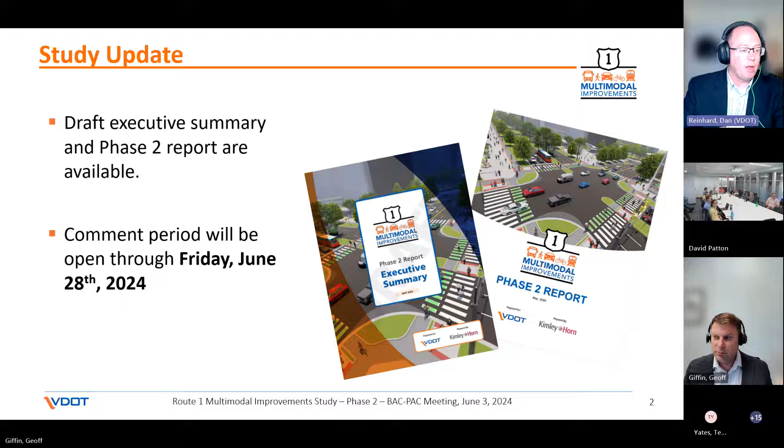One of the things we want to make clear is where we are in the process. There were quite a few comments or questions looking for very specific details—the one that jumps to mind was about what kind of trees we're going to plant. So I thought this would be a good opportunity to talk about where we are.

Right now we're doing a feasibility study. The goal of Phase 1 and Phase 2 is: can we build? First we evaluated the different options. We made a recommendation in the Phase 1 report to bring 15th and 18th Street down to grade and do improvements at 20th Street. We've expanded that to 23rd Street now in Phase 2. Phase 2 is to further flesh out those details, look at the TDM strategy to reduce traffic, expand on the multimodal analysis, and do 10% design plans. But that's all still really in that feasibility window.

Down at the bottom you see a rough sketch of what the process will look like going forward. So we're at the feasibility study stage. Once we get full funding for the project, we'll move into the project development process, which starts with scoping, and we'll move through each of these steps to get to construction. There will be another round of public meetings as part of that project development process, including a public hearing. So just because we wrap up Phase 2 here does not mean this is the end of the opportunity for public input.

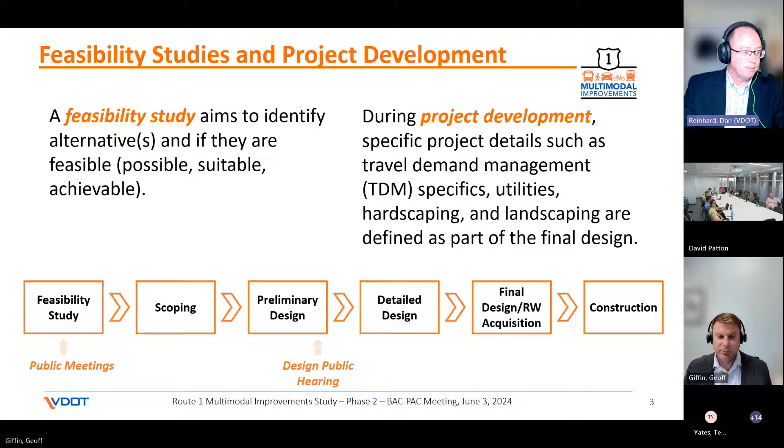So a couple quick updates on the speed study. We have put together a speed study and submitted it to the district traffic engineer. It is currently under review. We are expecting comments from him, and there'll probably be some back and forth, but we are anticipating that this will get approved so we can move forward.

The speed study south of 23rd Street to the Arlington County line—your request for that speed study was received and passed down to staff. They have talked to us. We are doing a preliminary analysis. This will be considered a separate project, a separate initiative from the Phase 1, Phase 2 study, the Route 1 multimodal project. That speed study would be considered a separate initiative.

Arlington County would be responsible for funding that effort, and VDOT would certainly conduct it. One of the interim steps we're doing is having our VDOT traffic engineering look at the available data—do we think this has a hope of success if we do a speed study? Because speed studies are fairly lengthy and can be fairly expensive. We were going to go through an initial evaluation process, pass that data along to Arlington County, and they'll make a determination with us about whether it's worth investing that time and effort. So that's where we are right now: VDOT Traffic Engineering is doing a cursory review of that area.

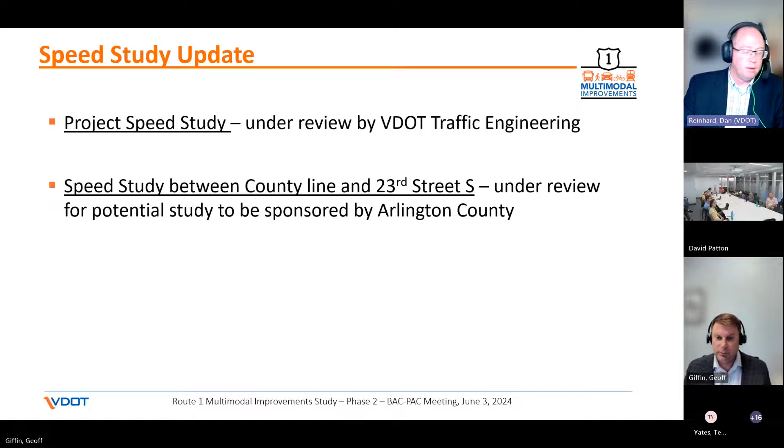Now we'll try to get into some of the questions and comments you passed along. There were a bunch of comments about enforcement, and I know enforcement's a big hot button issue. The way the project is looking at this is we've met with Arlington County Police Department as well as Virginia State Police, but the approach the project needs to take is looking for ways we can assist them with construction-related enforcement in the future. There were lots of questions of whether they're going to do enforcement, whether enforcement will be front and center, and what the agreements are.

Unfortunately, the project can't create policy for either of those entities—we can't drive their enforcement. But one of the things we did do is talk through: okay, if you go out and do enforcement, what are the criteria you need? Where do you have to be stationed?

Because there were specific criteria where we have to be in a certain place on the side of the road, out of traffic, those sorts of things, we have some ideas based on those conversations with, for example, what they call a perch, an area they can sit and run radar. So we're going to be incorporating some of that into the 10% design plans. We'll go back to them and work through that design, and hopefully we'll have that for you in the fall at our next public meeting. That's kind of the way we're looking at enforcement.

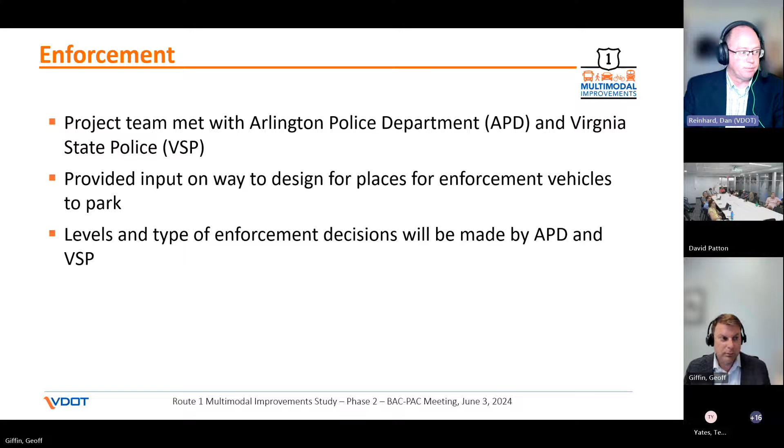For travel demand management, there were some questions about the outreach we've done with the regional transit providers. It was kind of a listening session for us in some respects. We did have some back and forth with them. We confirmed existing service, talked about planned and future service. Several told us about studies they're doing about their service and changes they may be trying to make. Not that they had detail for us, but there are processes going on in the background. So they helped us with our TDM strategies as far as how do we shift people onto transit and different modes of transportation. We talked through with them the existing needs at the bus stops under 18th Street, and that fed our relocation of those onto Bell Street. That's where we went with the travel demand management discussions with the transit providers.

As we get into some of the data here, I'm going to turn it over to Geoff Giffin with Kimley Horn. Great, thanks Dan, and good evening everyone. I mentioned before I'm Geoff Giffin with Kimley Horn, and I have a variety of other folks with me this evening, some of the more technical folks that have been helping on the study, so if we have more detailed questions later they can help me answer those.

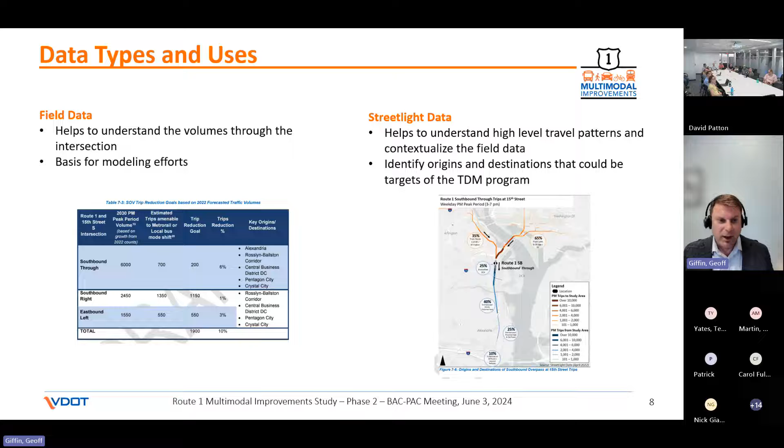So we mix and match those a little bit together. It's not always an apples to apples comparison, because the data from streetlight isn't every individual vehicle - it's a conglomeration of whoever has their devices turned on, so it's a bit of an estimation. We don't take that as the ground truth, it's just a pattern we use for our planning. Hopefully that answers some of those questions related to the data.

Another question related to the data was on figure 3-2 in the report, where there's a gray box that says poor data due to the weather and Omicron. There were questions about whether the whole data set is still good. I wanted to clarify this box represents a very short window of time, a couple weeks to a month, where there was probably the last big snowstorm this area has seen and everything was shut down. With the Omicron variant surging, there were a lot of changes with people working from home again. So that was a blip on the radar - we just ignored that short window of time, but the rest of the data is still very valid. It was very helpful as we looked at patterns coming out of the pandemic and what we call the new normal. That's how we were assessing it, and that clarifies what that note meant on that figure.

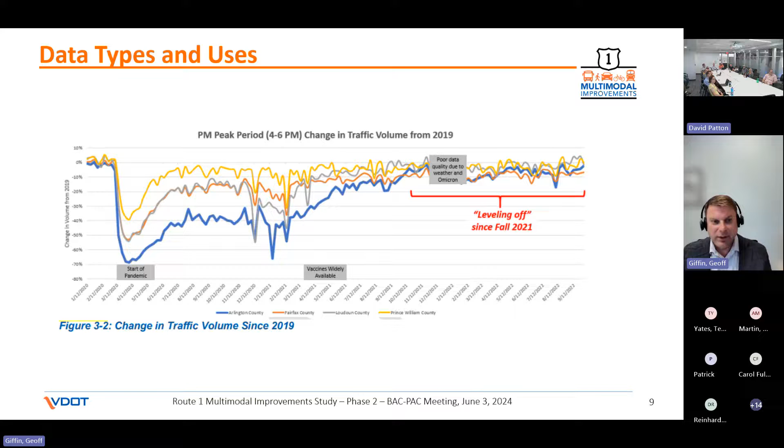So the next series of questions and comments were very location specific. We're going to go along the corridor, starting from the south.

Starting at 23rd Street South and Route 1, there was a question whether VDOT will include a dedicated left turn signal on the eastbound movement. If you look on the screen, this would be coming down on the screen to turn towards the right of the page—that would be eastbound to northbound. There currently is not a left turn arrow now.

We were planning to not add that, mostly because operations worked without it. If we did add a left turn phase or arrow, that would likely increase the need to raise the cycle length for the whole traffic signal. And not only would we have to raise the cycle length for that signal, we'd have to raise it for all of the signals along Route 1, because that's a coordinated system tied together to make sure they operate well together. So at this point we don't anticipate having that left turn arrow, but as Dan mentioned earlier, this is a feasibility stage—things could change in the future, but right now we're not planning on that.

There was a question why we didn't include a no right turn on red for the eastbound right turn movement. Again, this is the same movement coming down on the page, turning to the left of the page, eastbound to southbound. There's not currently a no turn on red there now. That movement is very heavy from a vehicle standpoint, and we did test it with a no turn on red, and what we found was that operations deteriorated pretty poorly. The queue spilled back past Eads Street, so that's not really a viable option at the moment.

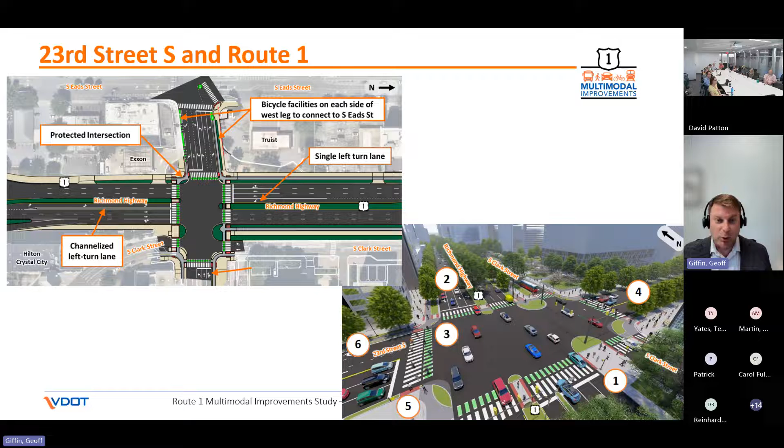All right, moving to the next intersection to the north, 23rd Street and Route 1. There was a question why there was a recommendation for the eastbound right turn lane to be stop controlled. You can see on my screen here, this movement. The answer is we are coordinated very closely with a signal plan that was being developed as part of an adjacent development. That's what was included in that design, and that design had been vetted very closely between Arlington County and VDOT, the traffic engineering and development staff. So at this time, that's what we were planning to maintain.

There was a question whether that could be signalized. That would be a very similar operation, and that could be considered again in the future into the detailed design.

There was another question at this location about how the signals could be improved for safer bicycle and pedestrian crossings of Route 1, dealing with conflicts, and whether LPIs would be included here. The answer to LPIs is yes, we will have LPIs. Again, there is an adjacent development that's going on, and it is responsible for improvements here. So the intersection we've based our design very closely on is tightening up that intersection.

It's bringing it more compact. There are other things being added, including a second crosswalk of Route 1. There currently is only one, so that does improve additional pedestrian circulation here. And also wide median refuges would allow for two-stage crossing if folks think that's more comfortable.

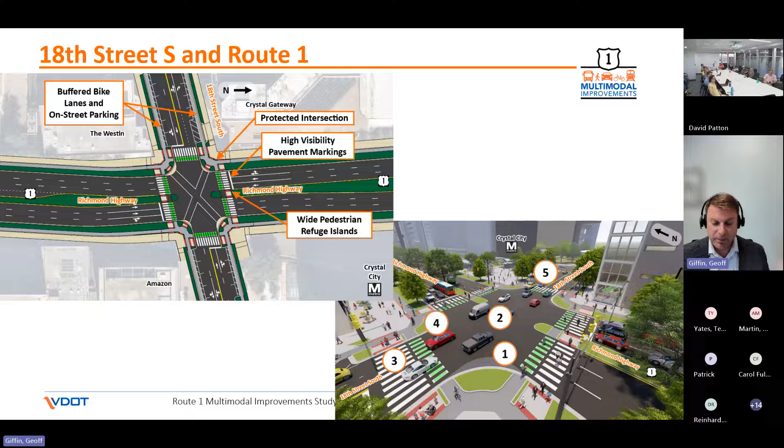There's also a variety of questions about the specific operation of the scramble related to the cycle length - would that increase the cycle length, how many phases would there be? Overall, whether or not there's an all pedestrian phase or pedestrian scramble does not change the cycle length.

We're going to need to match the cycle length for the corridor. Really, that's driven by 23rd Street and 15th Street. So having an all pedestrian phase, the Barnes Dance, doesn't change the cycle length.

With the pedestrian scramble, there will be 3 phases. Northbound and southbound traffic along Route 1 would be 1 phase. The second phase would be east and west along 18th Street vehicle phases. And the third phase would be the scramble, where all the pedestrians and bicyclists could occur without conflicts from the vehicles.

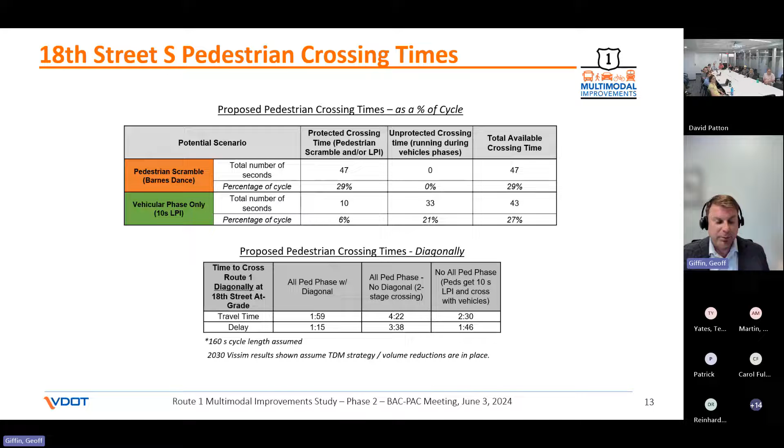Moving north again to 15th Street at Route 1, the next question was related to the eastbound movement and whether we needed to have the 2 eastbound left turn lanes, and whether that was important from a vehicle standpoint. Also, is there anything we can do for bicycle pedestrian safety at this location?

So yes, those 2 eastbound left turn lanes are very important. That's a very, very heavy movement from a vehicle standpoint. That's kind of the last opportunity to go from the west of Route 1 to the north, to either go north into the district or up Route 110.

So it is very important that we keep those lanes. But there are a lot of opportunities for bicycle and pedestrian safety which we've implemented here. We proposed no turn on red for the whole intersection, LPIs again for all of those, large median refuges, and the proposed lower speed limit. So there's a lot of safety measures being implemented along with this intersection.

There was another question or comment related to whether or not in the southbound direction on Route 1, the rightmost lane could be a right turn only lane instead of a shared through and right. We did look at that as one of the options based on earlier comments in the study.

What we found was that we believe the 3 through lanes are very important. It's part of the core capacity for the corridor - this is on the NHS system. So we think it's very important to make sure we have 3 through lanes. We did consider adding a right turn lane on top of that - obviously there are trade-offs with that, it's a wider crossing. So this is where we are with the recommendation for now, but if there are further comments on that, it can be looked at a little bit more closely.

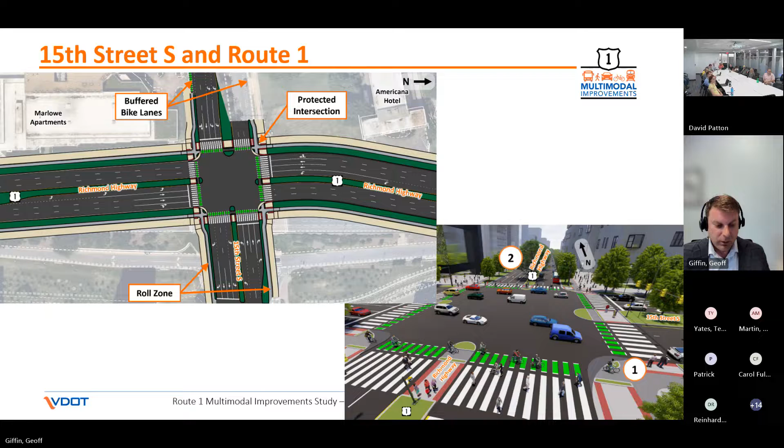That also provides the opportunity to connect down to the planned Longbridge Drive bicycle facility that staff is planning, and to the Mount Vernon Trail via the future bridge across the Potomac. So there's a lot of opportunities to connect the facilities along Route 1 further north with other existing and planned facilities. On the west side, this would connect to Army Navy Drive and all the facilities there, and into the Pentagon to the west. So there's a lot of ways to circulate from there, and the Route 1 facilities would really enhance the network.

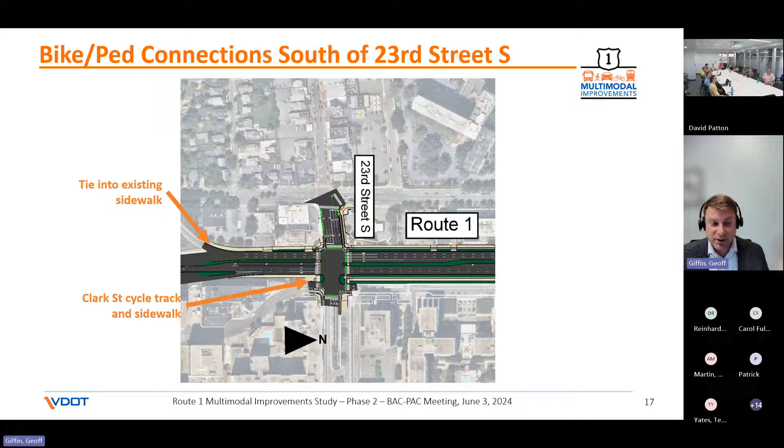So we tried to answer as many questions as we can. Dan, I'll give you a chance to add anything else that I perhaps forgot or that you wanted to add on, so feel free to.

Hi. Can you go over again what happens between 15th and 12th, especially for bike paths that are on the west side? How do they get off of Route 1 before it becomes 395?

Yes. And on the east side there's going to be a connection to the future bike path over there? Yes. Okay, thank you for managing to put most of our questions into a very compact, useful explanation. We look forward to studying your slides.

Other questions? I have some quick questions. One, can you make the speed limits consistent at the southern end where you don't currently have the speed study, and you're going to do the speed evaluation and then see about doing a speed study? I'm asking, do you need to do the formal expensive speed study in order to make a determination that you're just going to make the speed limits consistent for that entire stretch?

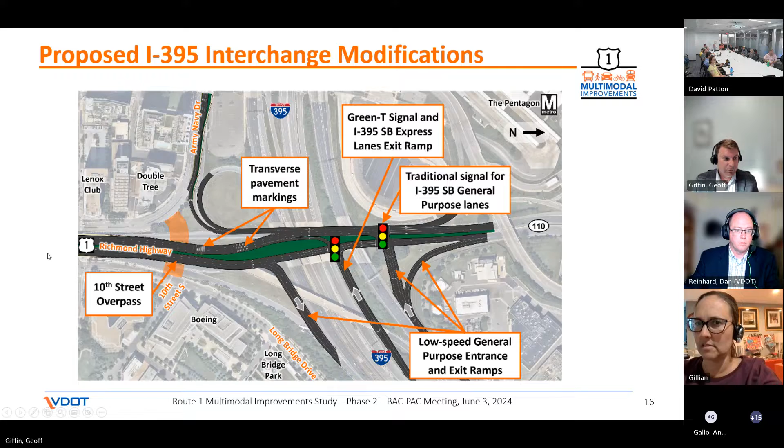So the bike infrastructure is shown here on Route 1 as the light gray lines behind the green. I'm trying to remember, I don't know that we've ever shown bike infrastructure on 20th Street itself. Oh, just the picture you're showing here doesn't have any bike infrastructure.

So Geoff, can you point to the gray for the cycle track? I see it on the map, but you also have a rendering. The rendering doesn't have any. It's here, kind of hard to see. So on this page, is this rendering what you're expecting to show?

Like those crosswalks are not going to have separated bike markings, that it's just going to mix when it comes to the intersections?

So this is the only intersection of all of them where we do not have the protected intersection geometry. And part of it's because of the constraints of those existing buildings, including the new building on the southeast corner.

So you're saying the bike infrastructure just disappears at the intersection? We will have to terminate it and have a mixing zone at those corners, yes.

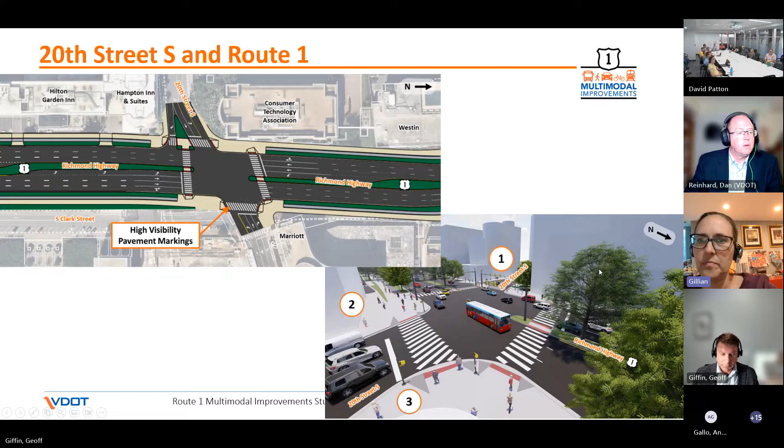And then the other question I had was about the ramp down to 12th that you were talking with Pam about. I'm mainly worried about the personal security aspects of that, the safety in terms of, is that going to be well lit? Is it going to be, are the sight lines going to be good? Is it going to be monitored, or is it going to feel like a scary, dark tunnel that people are very suddenly forced into?

It may be very similar to the 15th Street ramp they have now, where you come up from 15th Street onto Route 1, and it will be a ramp up next to a retaining wall. But we haven't gotten into the level of detail where we've evaluated lighting and how much we're going to provide at that point. Some of that gets into the detailed design we don't have yet.

Do you have women on your design team? I feel like I haven't seen any women present for you guys. We do, actually - we have Kyla on tonight.

Hopefully you can factor that in, because if you design something that isn't safe from a personal security aspect, it's not usable by a large segment of the population. With redevelopment, as more properties embrace Route 1, this will become less of an issue and we can look at different treatments along that section. But we wanted to provide connectivity for anyone who wants to travel further north on Route 1. Right, but you have to make sure you design it so it works for anyone, not just people brave enough to walk down the cavern.

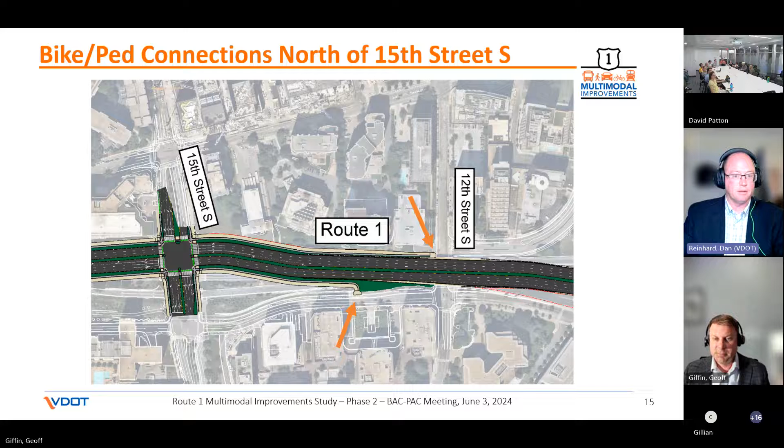Thank you very much, we appreciate your time and responding to our questions - very helpful. Look forward to getting your slides. We really appreciate that you did this on short notice. Thanks for having us again. Thank you, Dan. Take care, good night.

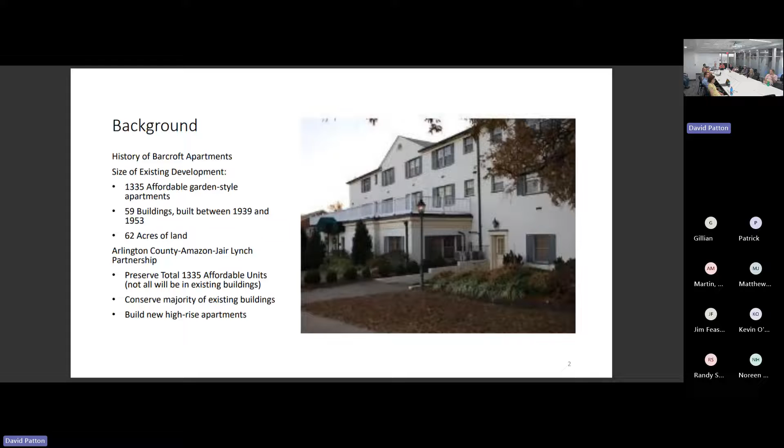But to do that, they have to do some redevelopment in order to pay back and everything else. So anyway, go to the next slide, David.

So this land use study and the expanded working group, I'm trying to explain to some folks, this is something between an area plan and a site plan approval. It's kind of a weird in between. So as you'll see, we got to see some things, but not all things and what the plan's going to be, because they're going to be developing this thing over many, many years.

So this is just a point at which the county is going to approve some of the concepts. And basically, there was a lot of focus on places where the plan deviates from existing planning documents, whether that be the form-based code, all the various Columbia Pike plans, Pike plan, PED plan. Go to the next slide.

So what they've shown so far basically is conservation areas, which are the parts of the development that they're not going to change in terms of the buildings. They're going to renovate the buildings, but they're going to stay same size, shape, and then which areas they're going to redevelop. For the ones they're going to redevelop, they're just giving us sort of heights and footprints, that's it, no more architectural details than that. And then an emphasis on vehicular and bicycle and ped circulation.

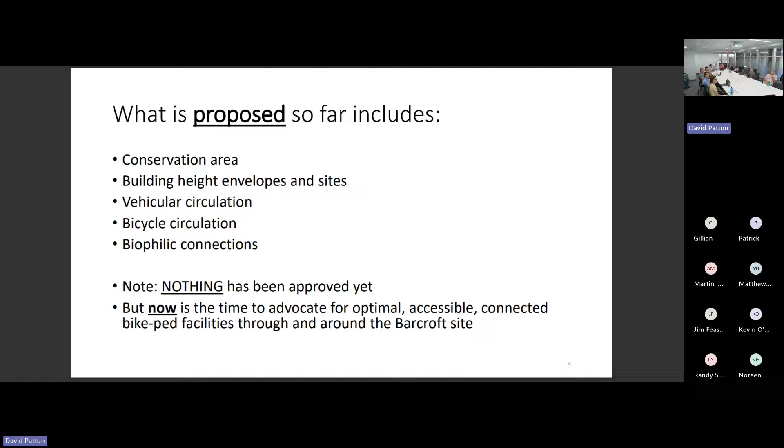So basically, they're trying to nail down the site concepts at this point and get the county's approval of it, which will be happening later this year. And that's our opportunity to comment on these items. So unlike a site plan where you get a lot more detail, this is going to be a little more general. Next slide. So this gives you an idea of where we are.

And this thing is sideways, so you got to kind of wrap your head, kind of try to look at it this way. Columbia Pike runs up and down on the left-hand side. So north is to the left. South George Mason is at the top of the page and kind of swings down and then intercepts 4 Mile Run at the bottom to the right of the page. So it's that whole development.

It's everything within that block, and then there's that triangle of development on the other side of George Mason, sort of between George Mason and Doctor's Run when it kind of resurfaces, kind of runs through the center of that. And then if you remember, the community garden plots are across the street from that area. So that's basically the area.

And this is their commitment. So the yellow area and some of the pink hatched areas are what they're calling conservation areas, which are the areas the buildings are going to stay and the roads are going to kind of stay the way they are. And they're going to try to keep the character of the community as best they can, out to the edges, basically the upper corner at Columbia Pike and George Mason, and the lower corner where Columbia Pike hits 4 Mile Run.

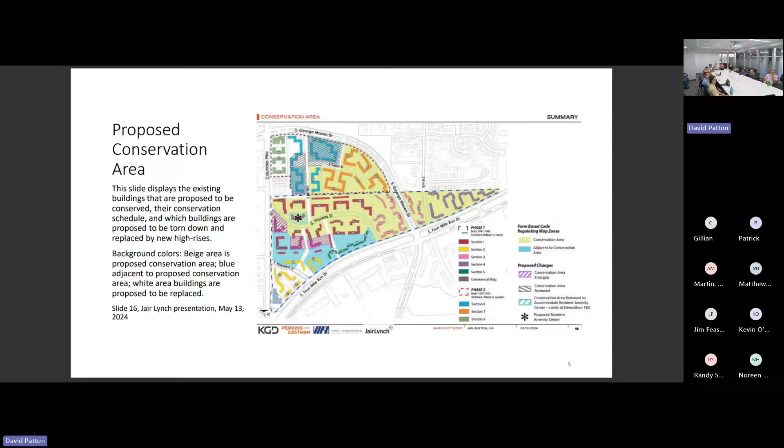That's where the Goodwill is and that stuff. That stuff's going to get redeveloped into larger buildings. Next slide. And then for these new buildings, they've already made some, they're making, I guess, a commitment at this point as to the height they're looking for.

So basically, they're trying to match sort of what's there existing. The top left is across the street from where the Harris Teeter is, the new Harris Teeter, where Food Star used to be. That's a 5-story building, 6-story. So it's close to what they're planning for across the street.

The old U-Haul lot is sort of part of this and sort of not, but they're saying that's going to be a similar size building. And then the other corner, similarly 8 to 10 stories, but you'll notice when you get down on 4 Mile Run, across the road from those really tall buildings that sit down there on the creek, they're proposing actually 14-story buildings there, so they will be as tall or maybe a little taller than those really tall buildings.

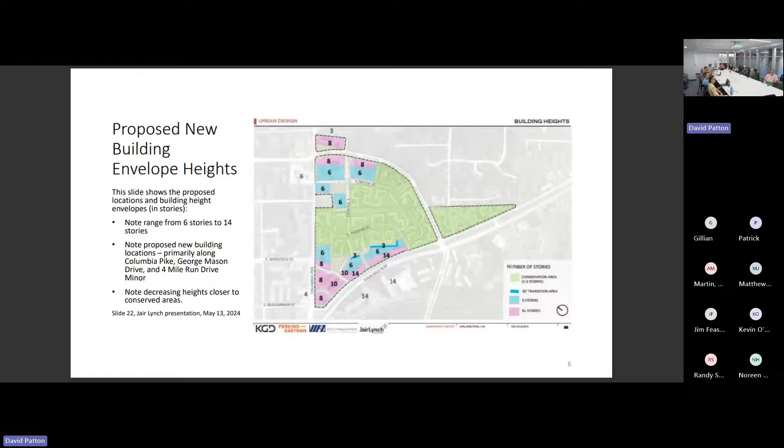And it's very steep. Yeah, we're going to talk a little bit about what's the steepness. Okay, go to the next page. So this is the existing vehicular kind of map.

There are a few major thoroughfares through this. The main one's Thomas, the snake-shaped one in the middle that's orange. Coming down from the top is 12th Road, which they're going to call 12th Street - confusing, but right now it's 12th Road. Then a few other smaller roads circle through. Many of these have parking along them, either straight in or diagonal, so they feel more like parking lots than roads.

Go to the next slide. So this I grabbed from the bike element. I'll give staff credit - they bring up the bike element and the other elements every meeting, so the staff is reading our planning documents. This is what we had in the bike element.

Now this is 90 degrees off again, so sorry about that. But what we had said in the bike element was we wanted bike facilities along George Mason, at least on one side. We anticipated a bike facility along 12th Road, and where 12th Road crosses George Mason, right now there's nothing. To the right, between George Mason and Quincy, it's woods - there's nothing there. It looked like from the bike element that might be a paper street, because we'd actually called it out as a bike lane on a roadway.

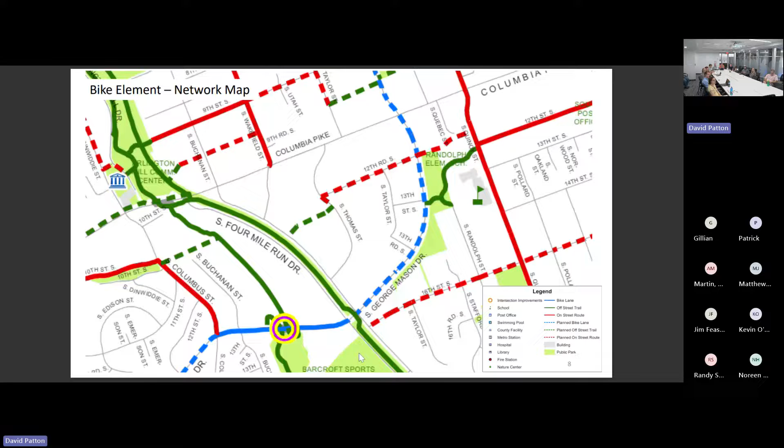So we had anticipated that throughput, getting to Thomas, taking a short jog, and then down what is now an access road, but that's very steep. To their credit, they took what we had proposed and tried to give us as close to that as they could. Go to the next slide and see what they're proposing.

Now you got to turn your head back 90 degrees again, sorry about that. Quincy is off the page to the top. They're showing a bike facility coming through the woods there - well no, that existing bike facility is already there, I should have mentioned that. That's the really steep path that comes through Doctors Run Park, and then it goes to the Hawk Signal, the existing Hawk Signal at George Mason.

So that's there. They're showing a path going basically next to the 7-Eleven, through the woods there. They don't really show what it does because it leaves their development, and that's not something they're going to build. So one of the issues with this is it's dependent on the county building that - some kind of crossing on George Mason, whether that's a Hawk Signal or something new, at least a crosswalk.

Then it comes up 12th Road, as we had put in the bike element - that part's the same. When it gets to Thomas, though, instead of doing that little jog over and down, it goes the other direction and goes down. So that purple part is new.

And then you see it kind of hits Wakefield, thank you. It just sort of dumps you on Wakefield, and then dumps you down to 4 Mile Run Minor - if you know that area, there's 4 Mile Run, there's a W&OD, and 4 Mile Run Minor is that little road that kind of goes above the W&OD. So they dump us with no bike, barely any ped facilities - there's nothing on that road. We did have some significant traffic when we were there.

The lower one just above Thomas is an alley. It doesn't have a sidewalk now, but it should have a sidewalk according to their own guidelines. Wakefield above it does have sidewalks on both sides. It also has parking, it's really tight to go anywhere.

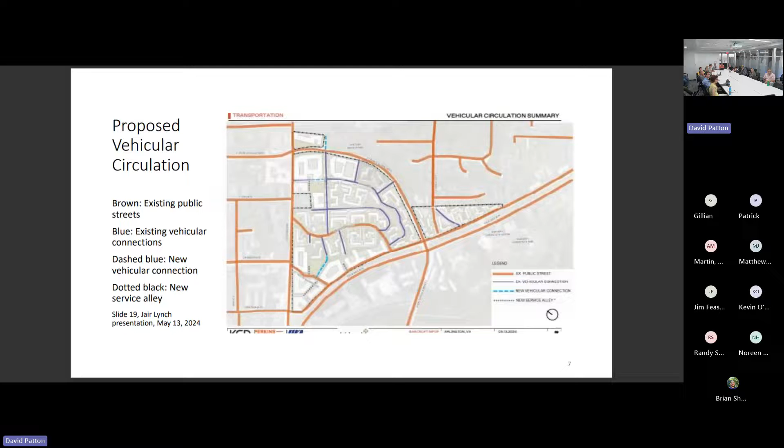So now go back to the biophilic, please. You can see a lot of that is not on this map, even though it should be, and the connection that's west of Thomas going down off of 12th Street. Is that the same one as the bike one, or is that a little bit different? I think it's the same. That part's the same, yeah.

Then they say that pedestrians can continue further down into the alleyways of these buildings, but that again is super steep, not sure how that would work. They're talking about at least that part being green, but it's so steep, I don't know how it's going to work. And the way over on the right, where Thomas comes down to Four Mile Run Minor, you can barely walk down those sidewalks.

It is so steep, and the access there is terrible. So one of our issues is we want to help the people who live there and make sure that they create paths that are accessible all the way through it, and follow perhaps more of these natural streets than some of these other things, and create paths around these stairways. So that's the biophilic.

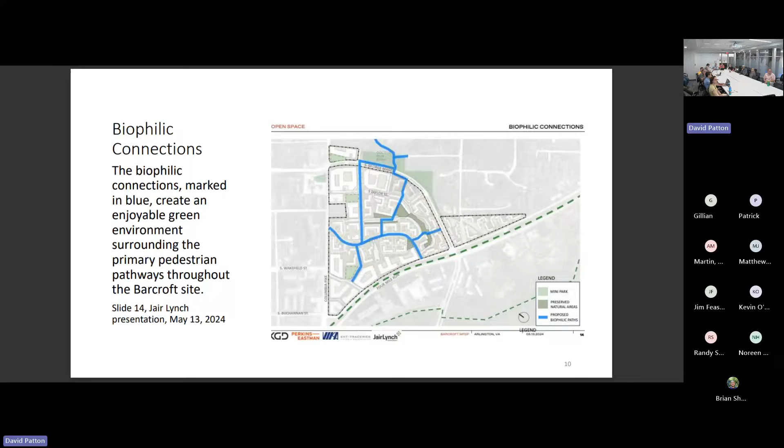Okay, this is for talking about—you really have to go there, it is incredible, it's this big hill. It is incredibly steep. And I like this slide because you see the wavy lines, those are the topographic lines. In the lower corner on the left side, you can see how steep it is going from the yellow down. It just line after line after line. It's very steep, some of the numbers are on it.

The top yellow is around Thomas, and that is basically a plain, it's relatively level, it's fairly big. But once you get off that, it's really steep very quickly. It's 200 feet tall right there, and it goes down to almost 100 feet by the time you get to the bottom. It's a fairly short distance and a lot of stuff to go over. So that's one of the big challenges here.

This also shows their proposed neighborhoods: George Mason Place, the Greenway, and Wakefield. The places where they are building are kind of on the corners and relatively level, but the main site, and especially the southeastern edge, is super steep.

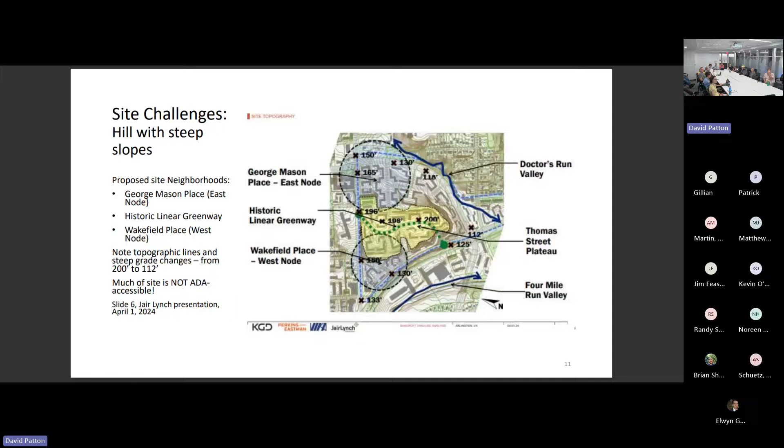Next slide. The area has had landslides. They had one in 2022 and 2024.

Can I ask? Sure. Can they do something Lombard Street like, create some switchbacks? I think switchbacks is what they need to do for some of the stairs, but I don't think this can be solved with switchbacks. And we could charge tourists a toll.

David Howell, who's on the working group, said it's going to be very hard to plant things there and have them thrive because it's such a damaged area. Hopefully they will fix this.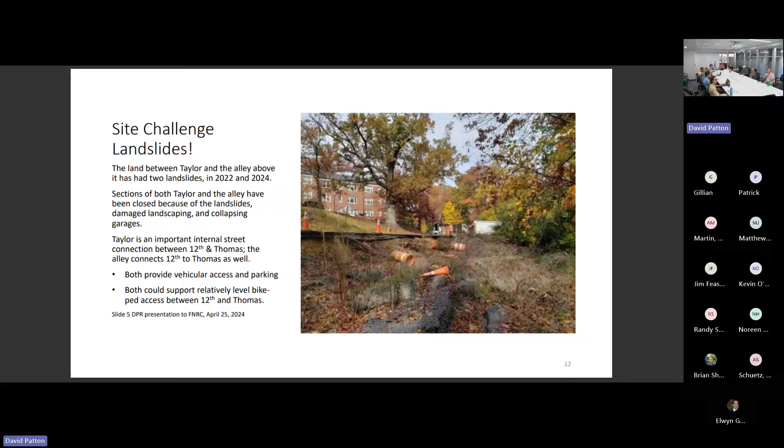So now we are going to the next slide. Forward. And you want to continue?

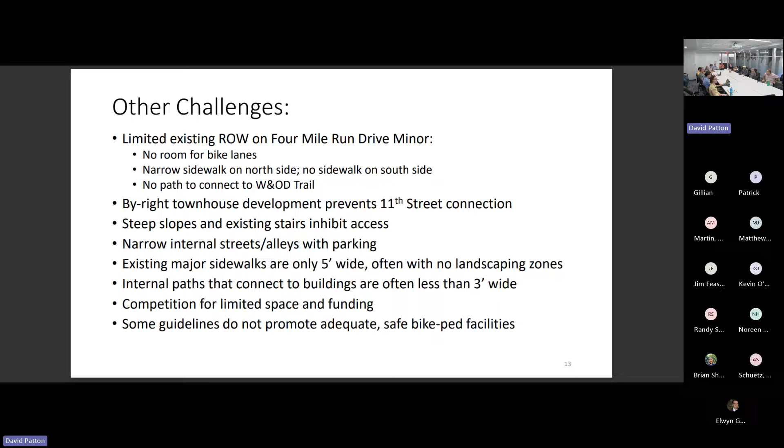4 Mile Run Minor is a big deal, not only because of what we've already talked about, but as I recall, they're going to put 2 14-story buildings, with however many people that is, right on 4 Mile Run Minor and dump them basically as pedestrians out onto that street. So one of the big deals is, can you fix 4 Mile Run Minor? There was some talk about, well, that's sort of outside the development, that's a county road, it's not up to us. But there's a big drop even from 4 Mile Run Minor down to the W&OD.

To build these 14-story buildings, they're going to have to excavate that whole area out, I'm assuming. So can you bring 4 Mile Run Minor down closer to the W&OD, flatten it out, widen it, and put facilities on it, both for pedestrians and bikes, to make that actually a nice corridor through there. That could help with a lot of this if they could do that.

There was talk about wanting to make an 11th Street connection up to Columbia Pike. If you look at the map, basically this entire mega block is one development except for this little square that sits on Columbia Pike, which if you remember had a house there for a long time that got torn down, and they built probably the ugliest townhomes I've ever seen. But that's outside the development, so 11th Street can't go through.

Steep slopes we've talked about, narrow internal streets and alleys with parking, and a lot of that's within that conservation zone, so you can't mess with the buildings. The other issue we didn't raise is that the community's biggest concern is parking, because a lot of them have construction jobs or other jobs where they really need to drive, and there are a lot of service vehicles. If you ever drive along George Mason there, it's all service trucks. So they're trying to maintain as much parking as possible. It's real controversial; we can't just take that parking away.

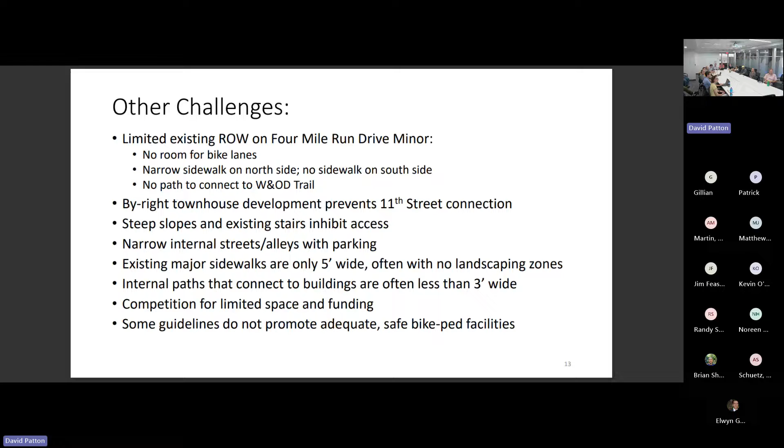Okay, go to the next slide. I'll let you do the general advocacy one, and I'll do the specific one. This is more general, right? How they do it? Yeah, okay.

All right, basically we would like to send a letter to the county manager, as all letters are, covering some of these issues.

We want to promote optimal bike facilities and connectivity for the site and its surroundings. We want to support the current residents, the surrounding neighborhoods, and those of us who actually pass through the site. We want to advocate for accessibility everywhere, especially on the site.

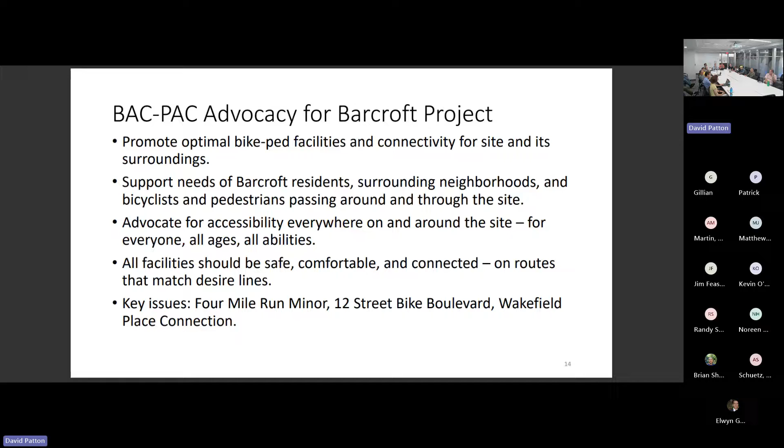All facilities should be safe, comfortable, connected on routes that match desire lines. As we've said, the 4 Mile Run Minor is the number one street that needs to be fixed. Doing a better 12th Street bike boulevard is important, and the Wakefield Place connection - how that works on both ends is difficult. Next slide. Thank you, so more specific.

So the issues I had around 12th Street - there's no use putting a nice 12th Street facility in if the county doesn't do the connection through to Quincy. However, that needs to be done. I think that's county-owned property, that's the north end of the park. It's not used. I know people object anytime we touch parkland, but I think that could be done.

The proposed bike route is relatively steep along 12th Street, very steep on Thomas. I think they need to come up with a better route than what they showed, even though part of it's what we showed in the bike element, to be honest with you. But...

As Pam had noted, 13th Street and 12th and Taylor kind of run along the contour. So if our goal is to get 12th Street connected to the W&OD, the existing path, the existing Hawk signal to Taylor, and then a bike facility on Taylor that took you around and got you down to 4 Mile Run Minor would be a better, more bikeable route than what they've currently planned.

So we want to propose that. And I think everybody knows this, but that is the end of the 12th Street Bike Boulevard, which at this point is almost continuous. We've gotten it pretty close. You still have that Bob & Edith's area - you can't get through there yet, but if that ever gets redeveloped, we've got something. It's not perfect all the way, but something all the way from Quincy.

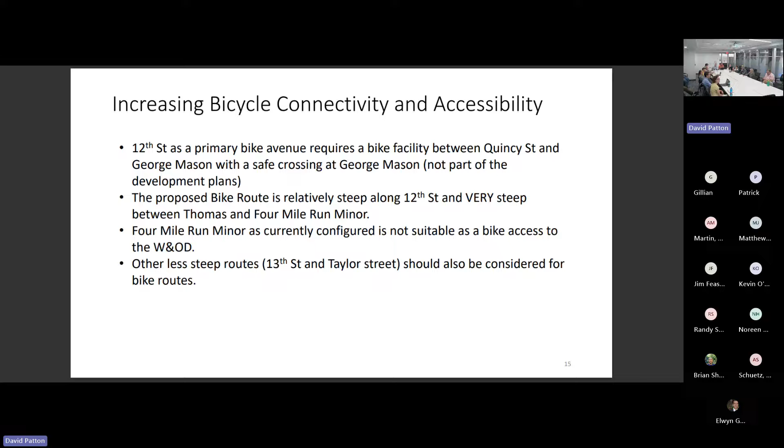And next, these are the pedestrian accessibility and connectivity issues. A lot of them are already the same as the bike ones, the main one being the 4 Mile Run Minor sidewalks. There is no sidewalk, bus stops are way too narrow. They do not match the form-based code guidelines at all.

And once they put these 14-story buildings right there, the sidewalks are going to have to be way bigger. One of the things I noticed walking around is the importance of having access to 4 Mile Run Minor if you're living down the hill. You're not going to want to go back up the hill over to Columbia Pike - you're going to get down to 4 Mile Run Minor and go around. It's much easier. And I saw a woman struggling to get her baby carriage over the ground and down Thomas to get to 4 Mile Run Minor.

And if you go around and look at her building, she has these huge staircases that come up from 4 Mile Run. There's no way you can do that with a bike or a baby carriage or anything. They really need to work on that. And for everyone, it needs to be more accessible and more usable.

The sidewalks on the site need to be wider. The main ones can be just 5 feet wide or 6 feet wide, which is their guidelines. Also for alleys, the pedestrian element says there should be a sidewalk in an alley, and that would really help. There's a 6 foot wide sidewalk - who knew? But only on one side.

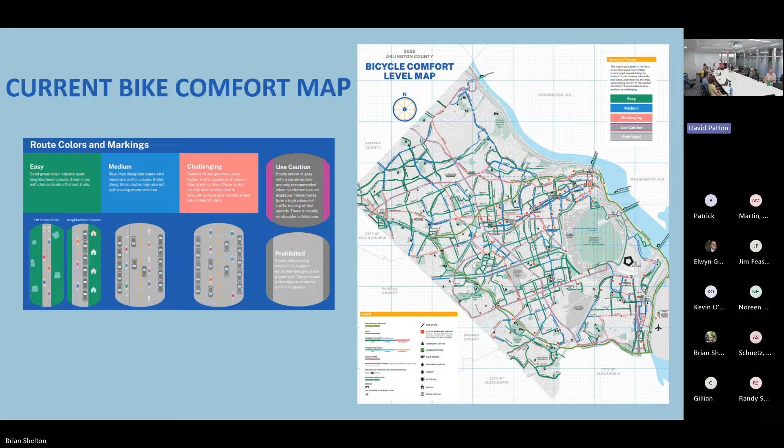To frame the study for the new bike comfort map we're proposing tonight, staff studied bicycle level of comfort maps and indexes from several jurisdictions around the country. We were looking to capture a more comprehensive definition of comfort, other than by street type, speed, and volume, which is what the current bike comfort map does. We felt comfort wasn't well captured or quantified by the existing map, and wanted to incorporate additional factors into an index that would identify a route as more or less comfortable to all cyclists.

These include things like parking turnover rates, presence of bus stops and bus routes, slopes, adjacent zoning, bike infrastructure - including infrastructure at intersections but also along the routes itself - behavioral complaints received through the county's Q Alert platform, and also the presence of traffic control devices, and quite a few more.

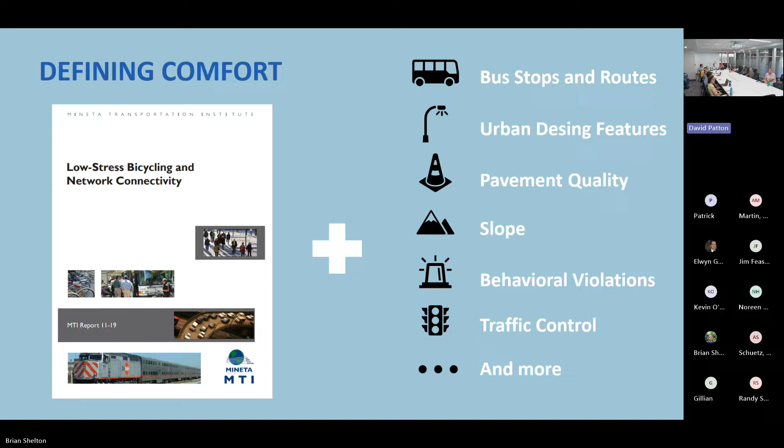This is what we've proposed so far. The index will consist of 3 separate subscores, each intended to capture an important factor in determining bicyclist comfort on our roadways and trails. A score will be added to each street segment, taking the street segment layer from our county's ArcGIS database. A street segment is the roadway between 2 intersections, typically - sometimes it can be longer, sometimes shorter, just to clarify.

The first subscore is the context. The second is traffic conditions and points of conflict along the street segments. And the third is the bicycle infrastructure along the street segments, intersections, and trails.

All the information available to us in ArcGIS will be used to generate a bicycle level of comfort score. This information comes from several departments within DES, like the Pavement Condition Index maintained by Water, Sewer, Streets. Other data like driver behavior and observed traffic volumes and speeds are collected from third-party sources like Q Alert, but also streetlight data. That information is mapped and added to our bicycle level of comfort index.

For other points like slope, traffic volumes, and speeds, we'll reference outside sources and authorities on those topics. For example, the National Association of City Transportation Officials has an All Ages and Abilities guidebook, which sets thresholds for comfortable speeds and volumes for bicycles, which will be incorporated into the score.

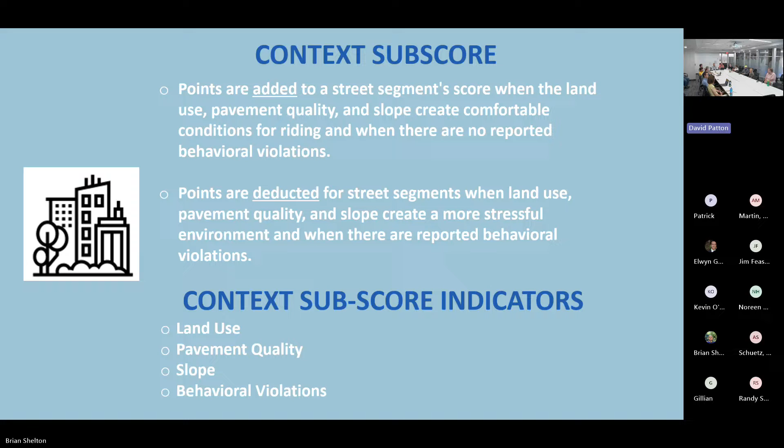Just as an example of what this might look like, this is one of the factors we have for this index, and that's land use. The scoring and weighting is still to be determined until after our meeting with Sam Schwartz, so you're looking at something that's likely hypothetical. The idea is that residential land use areas are generally more comfortable to ride through than the service, industrial, commercial land use areas shown at the bottom of the screen.

At the top of the screen it's part of the 12th Street Bike Boulevard network, leading up to Quincy, right near Randolph Elementary School. The street is surrounded by residential land use areas that would score the highest number of points for a number of reasons. Typically, these areas are shaded, have streetlights, and typically have fewer traffic conflicts than street segments surrounded by other land use categories.

Often neighborhood streets are narrower than street segments surrounded by mixed use areas and service industrial areas, which does tend to improve traffic safety. One thing to keep in mind in the way this index is meant to work is that not all neighborhood streets are the same, but for now we have to assume that they are generally more comfortable to ride along. There are some examples with higher recorded traffic volumes and speeds, but those will be captured in other elements of the bike comfort index. So that street, even though it is a neighborhood street now, will receive more points—but in other parts of the index, it'll be knocked for those high volumes, it'll be knocked for those high speeds.

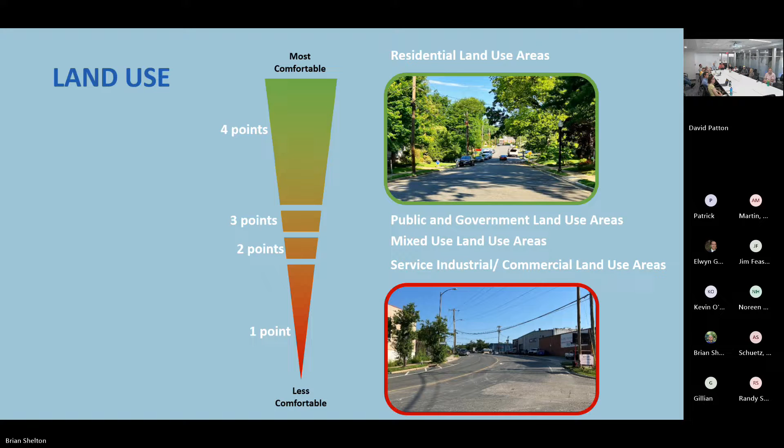Second is the traffic subscore. It considers factors that have an impact on someone's feeling of comfort or discomfort. Actually, it's a little bit more than 4.

Many of these indicators are based on the low stress bicycling and network connectivity report produced by the Mineta Transportation Institute, which has widely determined the level of traffic stress, and it's what many jurisdictions around the country use to make their own level of comfort stress maps. There are quite a bit of these, so I'll just touch on them again briefly.

One is the number of travel lanes. The more travel lanes there are, the more uncomfortable the segment becomes to cyclists. Think traffic volumes, traffic speeds, lack of shade, riding in heavy traffic, or riding behind the tailpipe of a car. Also the direction of travel lanes - is this a one-way street, or does it support bi-directional travel and therefore more connectivity? And observed traffic volume.

Preferred volumes are defined by NACTO, and those thresholds are reflected in our index. Same with traffic speeds. We also wanted to include parking - this creates potential conflict with cyclists. Think of cars pulling out of a parking space or someone opening a door into a bike lane. We also want to include the presence of bus stops, RRFBs, and then also take notice of the posted speed limit on the street segment.

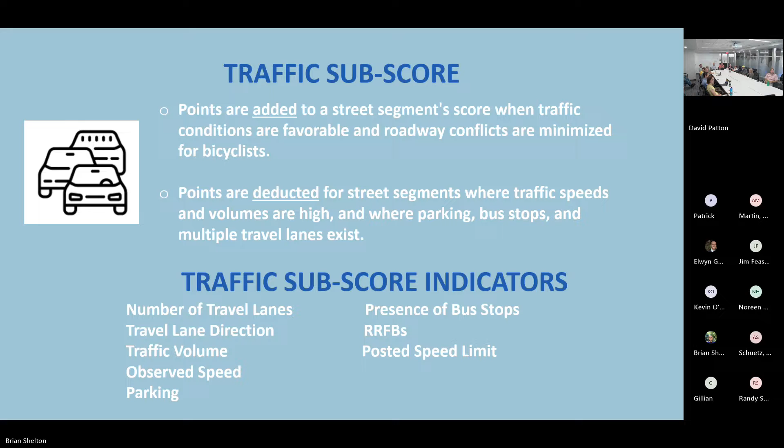So, of the 3 things that you have - context, traffic, and infrastructure - which one has the focus on connectivity? That would be the traffic subscore, when we're looking at the direction of the travel lanes. Okay, thanks.

Right, so just real quick to show you an example of what the traffic volumes might look like and what the scores might look like. We've taken the all ages and abilities guidelines from NACTO to set the thresholds for each of these buckets.

The lower volume that we have, the more points the street will get. When we approach volumes of 6,000 or above, the street receives far less points. And the same table would be used for speeds as well.

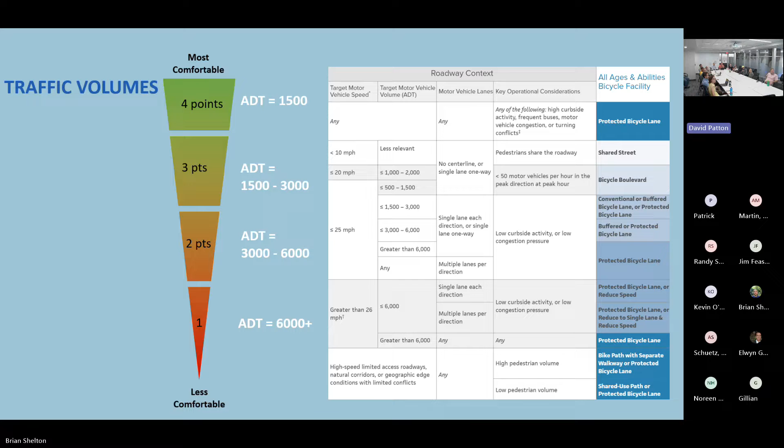With that, we have the bicycle infrastructure subscore. Again, points will be added for street segments that have bicycle facilities - more points for protected bike facilities, less points for bike lanes. Points are deducted for street segments or trails with fair weather crossings. Think of 4 Mile Run Trail in Glencarlyn Park, the W&OD Trail underpass at Wilson Boulevard near Bon Air Rose Garden. That would lose points because of that fair weather crossing - not all days is that crossing available to me.

Some of the indicators that we're using for the bike infrastructure subscore: the bike facility type, the intersection bicycle facility types, whether it's a protected intersection, does it have green pavement markings to get you across the intersection, is there a bike box or a 2-stage turn box, and then also fair weather crossings.

And it's not really visible here, but right now what we do have is a draft map of what this might look like in the county. Most of the blue is going to be our level 1 - these are the most comfortable. Level 4 is the least comfortable, and it includes red. We also have limited access roads, highways, and federal roads, which are gray, and those are all restricted or prohibited.

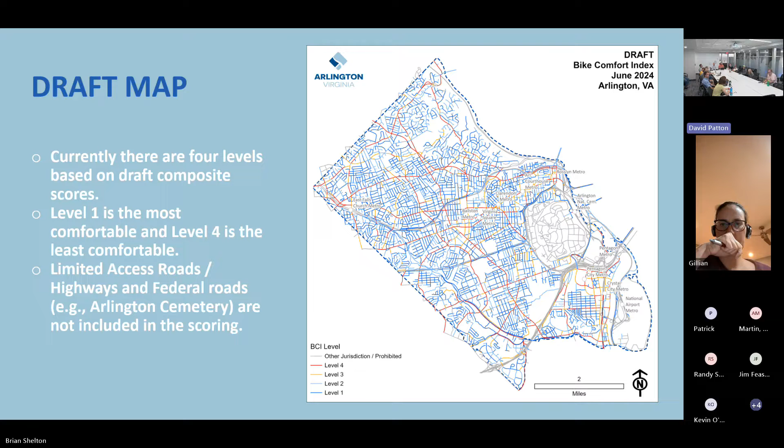Okay, thanks. So just to give you an idea of what our current index is showing us, this is a prohibited street - this is Arlington Boulevard. It's a limited access road. God bless you if you try it.

So it sounds like we're in agreement. I think bikes take a lane. Yeah, they gotta get it off, that's why.

So you have a different definition of limited access than the legal one? The definition that we're using for limited access is what we have in our GIS. So our GIS will have every roadway, street segment in the county classified under certain different types.

Okay, so let's start with level 4. We have, for example, this is South George Mason Drive approaching Arlington Boulevard. The reason it is a level 4 is because there are high volumes and speeds. There's multiple lanes of travel. It's also a signalized intersection, which does give it a few extra points. This is also where the bike lane ends. Just ahead is the merge.

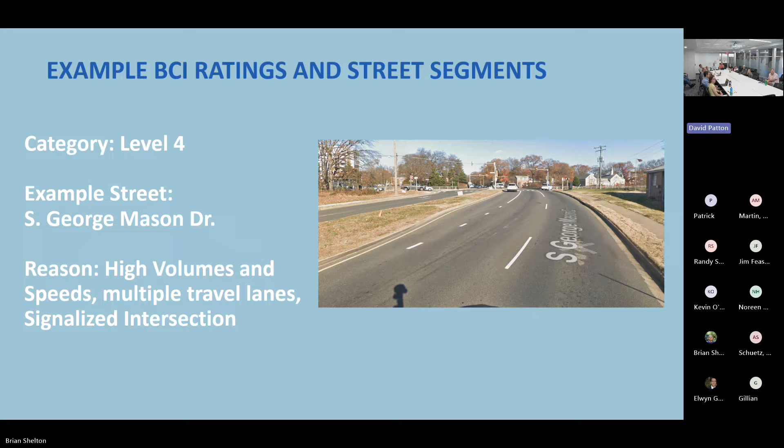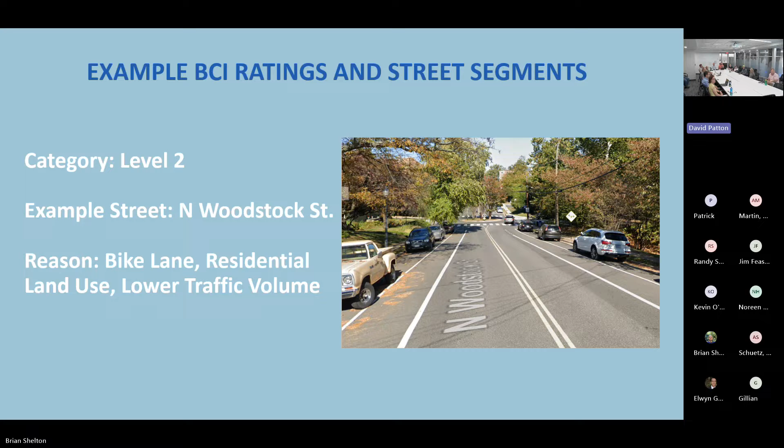Our level 2, this is an example of North Woodstock Street. It is a level 2 because it does have a bike lane, goes through a residentially zoned land use area, and it has lower traffic volumes than what you might see on this boulevard, for example.

So with that, we have our next steps. We'll be meeting with Sam Schwartz this week to discuss the weighting of the scores and how everything kind of meshes and combines together. After that meeting, we'll be able to produce a final map, which can be printed and then published online.

And then we intend to share that map with the BAC for further input before it does go live. We've made notes of your earlier suggestions and can use some of that feedback to see if the street segment scores again align with some of your own experiences that you have on your bike. Kind of do that as an exercise.

With that, we can start with Gillian.

Thank you. Thanks so much for the presentation and for all of the thought that's gone into putting some objective standards behind the comfort map. A couple things: I didn't hear anything about bike volume, like the volume of bike traffic on a route. And a lot of studies show that the number one indicator of safety for people biking is how many people are biking.